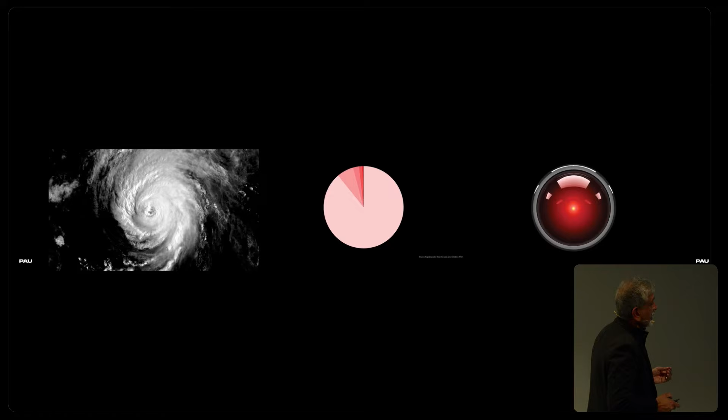That fear of technology, the idea of what AI is going to do to our world. But even more recently, technology in terms of the pandemic, and understanding that it created all sorts of mental health issues and loneliness issues that we're still struggling with, especially young people today. So I want to get back to that.

So what's interesting is, as you talk about loneliness at one level, you have a world that by the end of this century will probably reach about 10 billion people, and we will probably hit peak population, going from about 8 to 10 billion people according to the United Nations, towards the end of this century. Then population will start to decrease slowly. But still, we have another 2 billion people to figure out how to house and feed. So all of these conditions - climate change, inequity, technology, mental and social health, and population change - I think that is the context that we practice under.

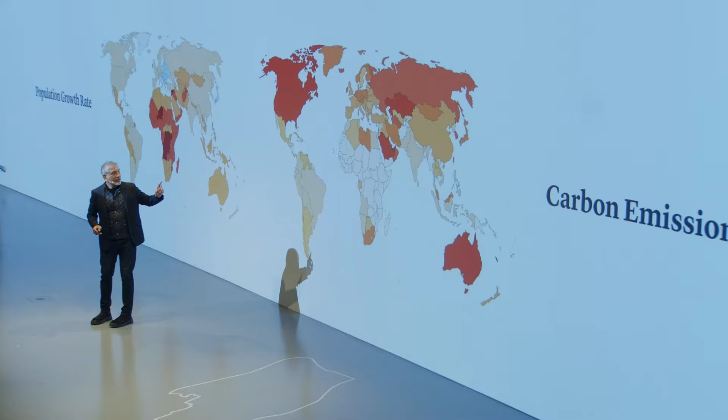What's driving climate change are the countries that have the most carbon emissions per capita. So you see these maps are almost opposites of each other - this is telling you that the places with the lowest birth rates are often using the most amount of carbon because of lifestyle and the way we live.

If you take a more granular look, this is from a data scientist at Berkeley in the United States. This is the East Coast of America - you see New York, Philadelphia, Baltimore, and Washington. What you notice is something very interesting: the carbon emissions per capita is very similar in the city as it is in the rural area.

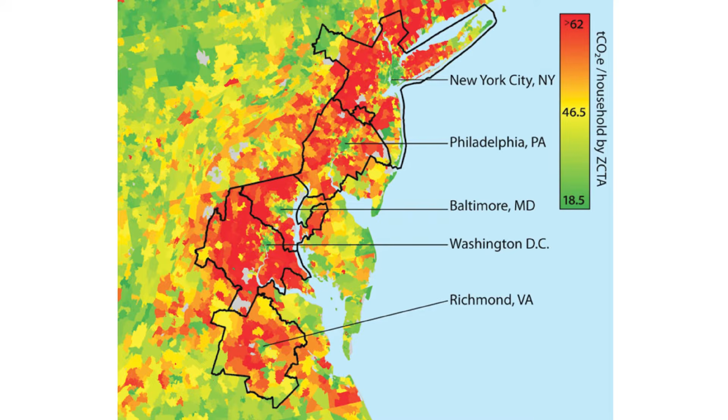Now this might be very different here in the Czech Republic, but in the United States we have this very severe problem, because since World War II we've been incentivizing people to live in those red zones called the suburbs. You see how high the carbon emissions per capita is in those suburbs, mainly because of a very intensive use of cars, houses, and landscaping, which has a strangely very dramatic impact.

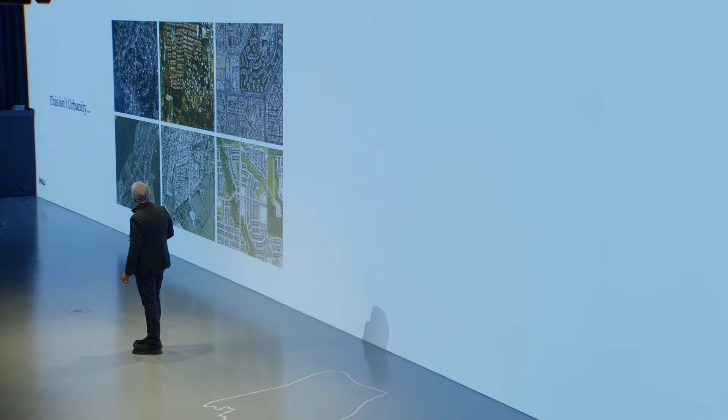And these are actually 6 suburban developments from 6 continents around the world. After World War II, the United States set up an idea for people that if you were successful, if you had made it, this is how you were to live - and they called it the American dream. That spread all over the world to the extent that about 2 billion people have entered the middle class since the 1990s, desiring this lifestyle as a symbol of success.

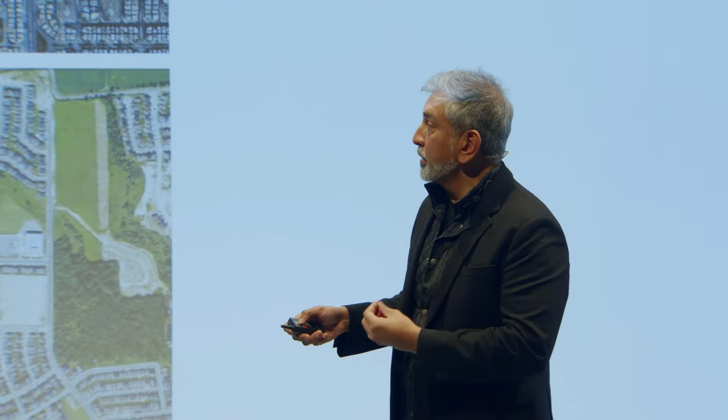But you can understand, as architects and urbanists, that this is an enormous problem in terms of the resources of the planet. It's also a social problem, an inequity problem - all of those things I started the lecture with. So this is really a difficult challenge, that billions of people are choosing to live this way.

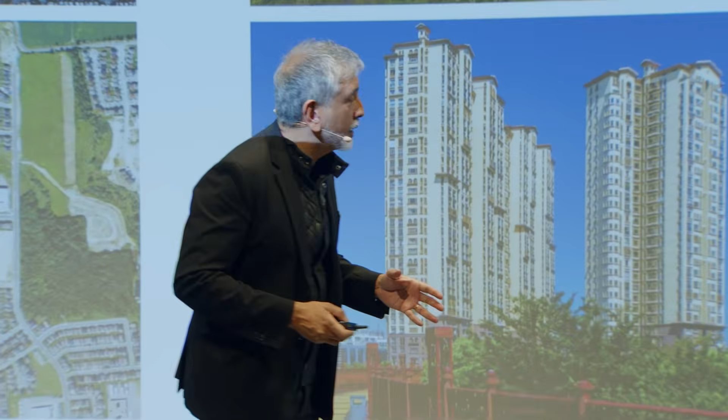But perhaps they're choosing to live this way because this is also a problem - our cities are growing in a way that's not very good. These are 6 housing complexes, again from 6 continents all over the world, where a global development industry has decided that the way to build housing in cities is to use a very generic, cookie-cutter approach - building the same housing complex everywhere, to the extent where people, when they travel, sometimes lose all sight of where they are, and we feel we're losing cultural identity because our buildings are becoming so similar.

These are also, interestingly, in many cities - and I'll talk a lot about this - becoming a huge challenge in terms of affordability.

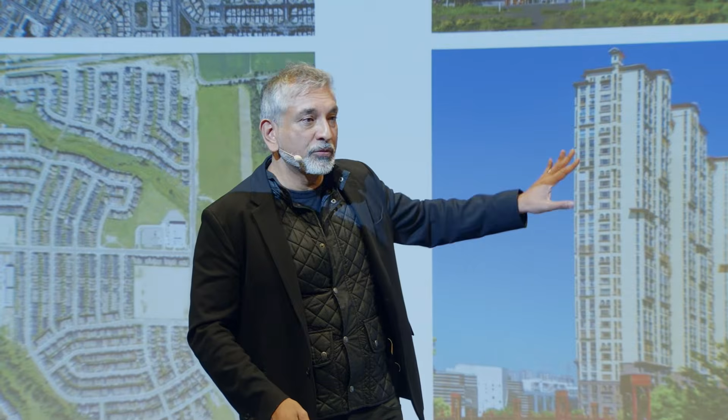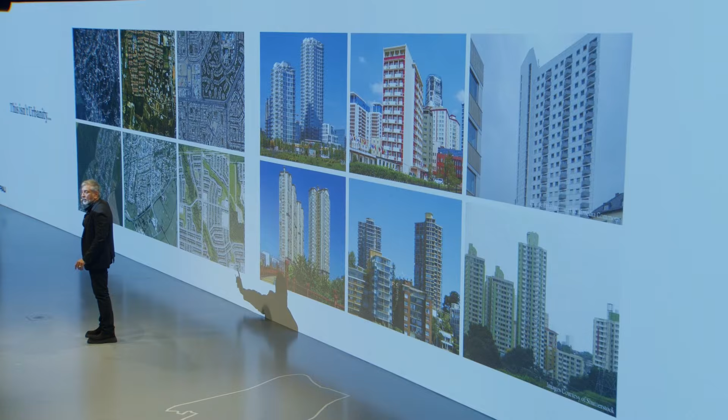I know I've heard a lot that this is a problem in Prague, that people have trouble affording housing in the city. So we have these two poles in which people are trying to figure out how to live. A lot of problems with this are driving this, because people say it's cheaper, I have more space, even if I have to drive my car into the city every day, I'd prefer to live this way with my family. So if we don't fix this, we can't fix that.

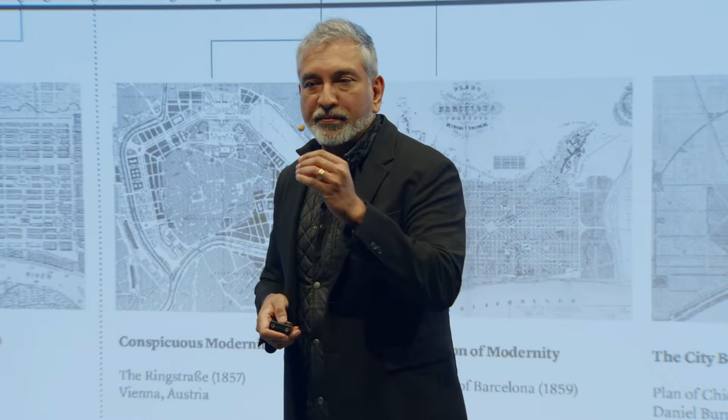So what is urbanity? If it wasn't those towers I was just showing you, what is it? We just had the ultimate test of this with the pandemic, where technologists and economists have been saying for a long time, if we just had the technology, people thought when the telephone was invented that we would stop living in cities.

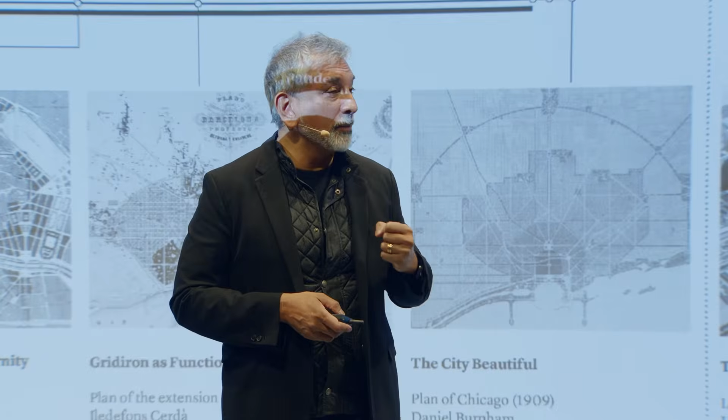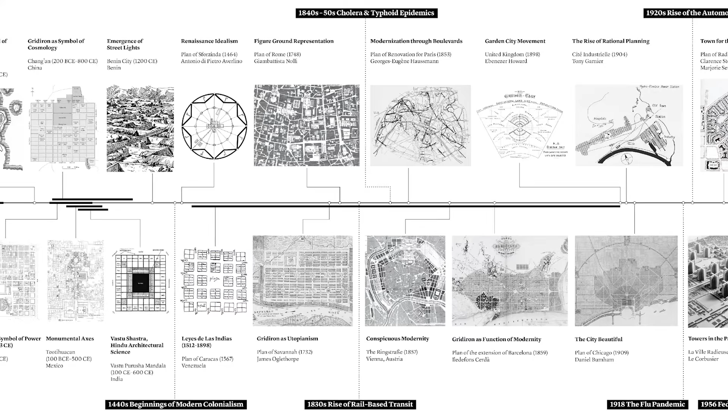And yet, it's who we are culturally. Since the beginning, really, of Homo sapien culture, we have been building collective environments, often for spiritual and cultural reasons, not just economic reasons, not just for trade. This has tended to be who we are, and you can map through civilization across almost every continent the way in which we built cities over time and built collective environments.

And the fact that we just went through a pandemic, and yet we're all here on a Friday night at 7 o'clock when it's cold outside, right? Because we actually enjoy a collective experience together, right?

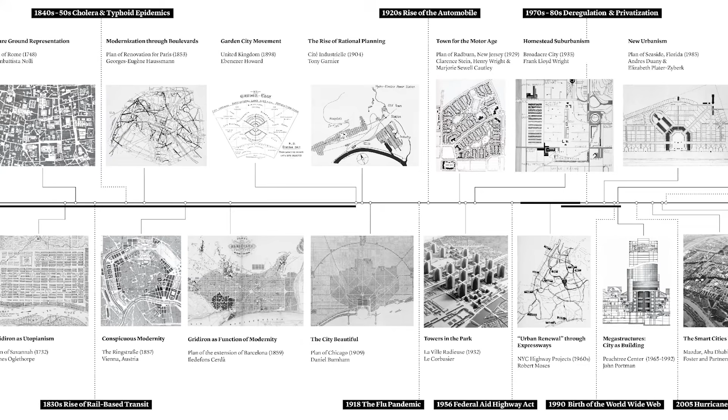So if that's who we are culturally, I've never worked on a screen like this, so I'm going to get a little confused about which slide is where.

We then need to think about, well, what is this urbanity thing? And I have a specific definition. I have a book coming out later this year that talks about this called The Architecture of Urbanity.

So I'm trying to use this word in a different way. What are the ingredients? This comes from a Greek city planner named Konstantin Doxiadis. He wrote this series of books called Ekistics, very interesting. He had this idea that in cities, or even in small villages, every once in a while someone was born who thought differently than the people around them.

They felt alienated in this small place where they lived, and so they started going to denser and denser environments until they finally met people who thought differently, like them. These are the artists, the weirdos, the geeks, the musicians, the architects, the people who just think maybe the world should be different. His idea of urbanity was that if those people met in a place like this, they would spread ideas, and those ideas would change the world.

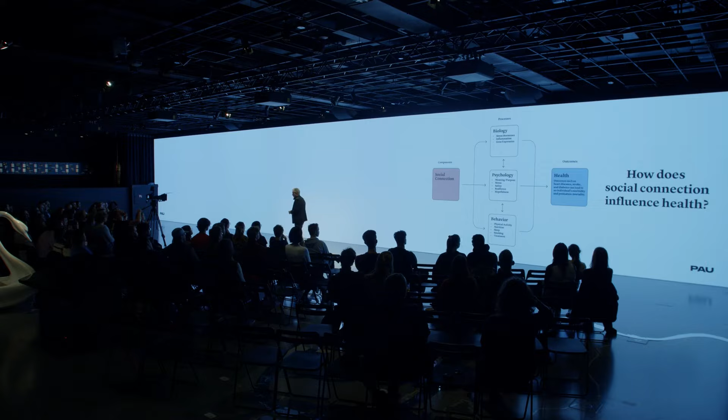Oops, sorry, I keep doing this. My team did this to me on purpose. They said, Vishaan, if you go left to right, then you can go right to left, and I'm not that smart.

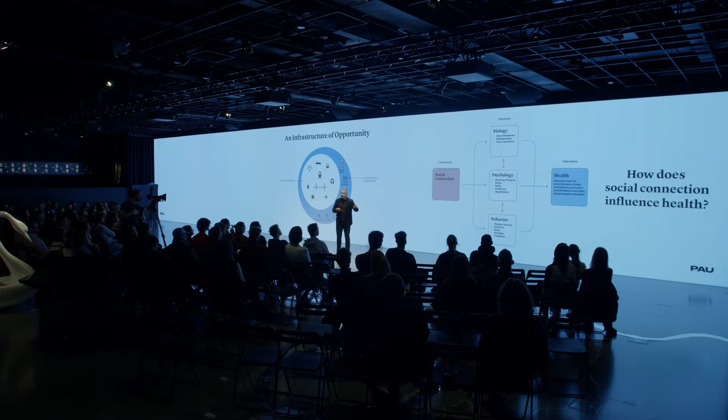So if you build those places I was just talking about, this is actually a diagram from the United States Surgeon General, the head of the medical authorities in the US. There's increasing research in public health that this idea of social connection, which I'm calling urbanity, is extremely good in helping the public health problems we're seeing in terms of loneliness. In terms of biology and psychology, our health is actually impacted by the number of social connections we have.

We talk about climate and these very, very large issues, but this is a very personal issue about how we interact with people and whether we can build environments that create more health. And so to do that, I think we can create things that advance social connection.

I call that an infrastructure of opportunity. What I mean by that is everything from public housing and social housing to green space, to public health care, walkability, accessibility, and so forth.

What that leads to is this idea of not just an economy, but not just jobs, because in a post-pandemic circumstance, when people have much more option in terms of where and how they work, to create more total environments, I think we need a sense of jobs as well as a sense of justice in our environment, that environments are equitable for people, and that they also create a sense of joy. And that, I think, comes from this idea of social connection.

So what I now want to do is give you a few case studies of this idea from our work. Some of it is architecture work, some of it is actually research that we do in our studio.

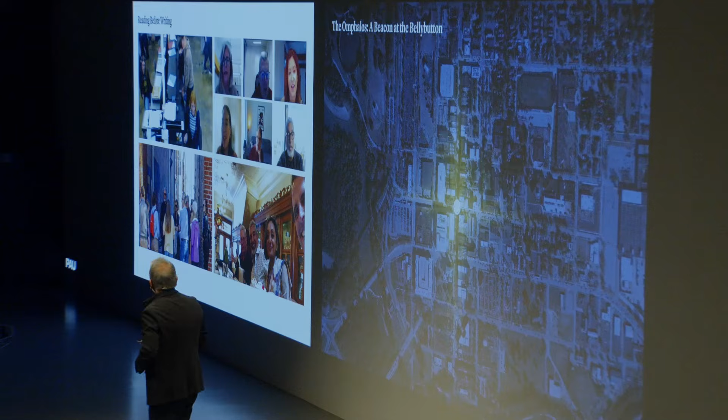And so we became very interested in the center. This is the main intersection in the city, and we called it the omphalos, a Greek word for the belly button, the navel of the city. We said we could really build something very interesting there.

One of the things we know about this intersection is there already were a lot of festivals where they would close down the street there. Actually, it's quite a diverse community, so different ethnic festivals would happen there. We already knew there was that tradition.

So we started doing what architects do. We started looking at what precedents might be interesting here. It's a square intersection, there was this idea of a gateway, and the Pantheon kept coming up.

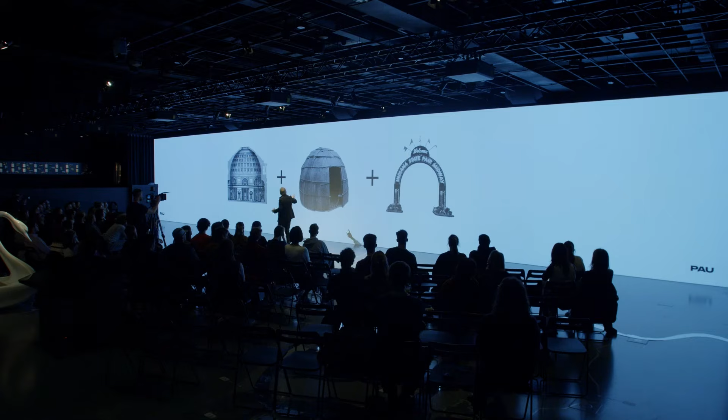These are wigwams, which the indigenous people who originally lived in this area built as dome structures. And then even more locally, there are these gateway structures that were built for local fairs.

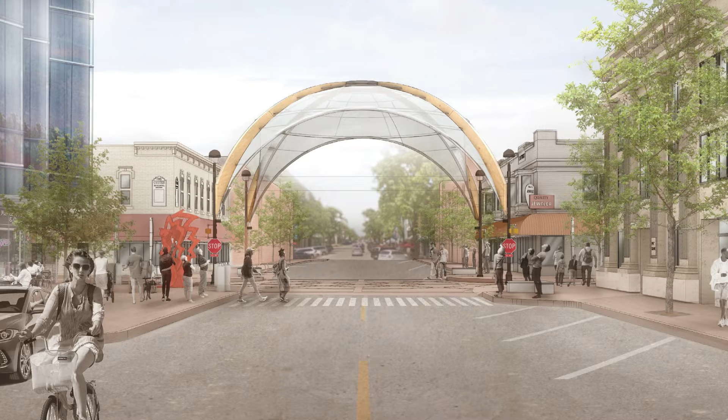And so we proposed this kind of tent-like structure. It's a very simple thing, right? Over the main intersection, it could also be a place for parties at night, lit up with projections and so forth. And people got very excited by the idea.

And so we started drawing it, and we had about 3 months for all of this. We came up with the right details and so forth.

And then it had to get built in about 6 weeks. So we had to commission the steel, commission the fabric, and up it goes and up it goes. And then, of course, we realized that the intersection wasn't square. It was actually a rectangle, which threw us for a while.

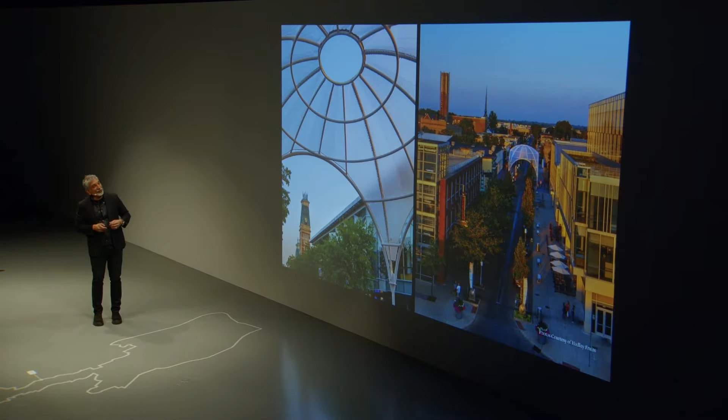And it was actually this very interesting success story. There it is again, and so there you see it. I just got a picture from a local resident who sent me a picture of it in the snow, because this was only supposed to be up until last month.

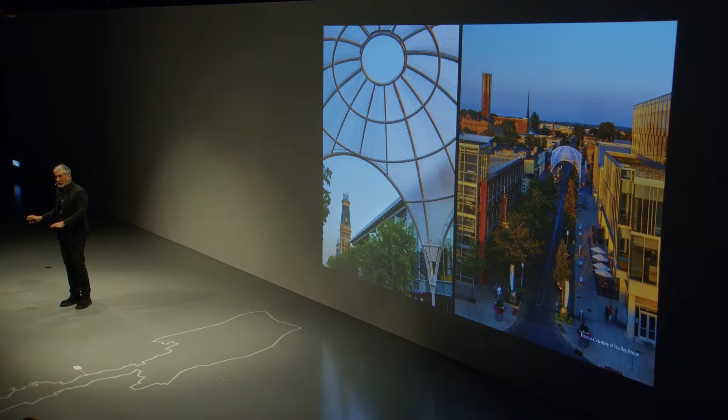But when we presented it to the community, they liked the idea so much, they said, we don't want it to be a temporary art exhibit, we want it for longer. Which meant we had to redesign the steel to hold snow and take a much larger load. And so we did that as quickly as we could.

And so this is the opening night party. You see me and one of my studio colleagues, Ruchi, our studio director, there. And someone arranged this extraordinary opening night party that had almost every ethnicity in the town—Japanese, Indian, Black, Latin American—do dance performances, and then this kind of extraordinary party happened afterwards with kids that were allowed to wear colors. They didn't just have to have all white uniforms on.

And they love this, and it's lit at night and so forth, and it's been a big success, and it's out there today. And it's been proof to me that a very small intervention can sometimes—

By the way, the most interesting thing about this is it's over an intersection that usually has cars. So this really freaked out the mayor, because the mayor's like, well, won't the businesses want cars? But the people wanted the space. And so now they're closing it more and more.

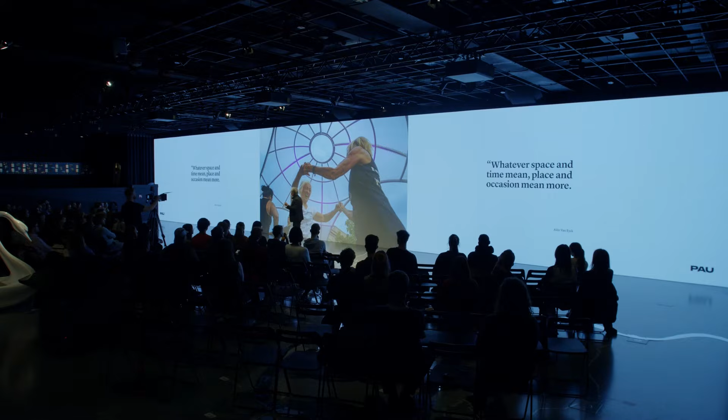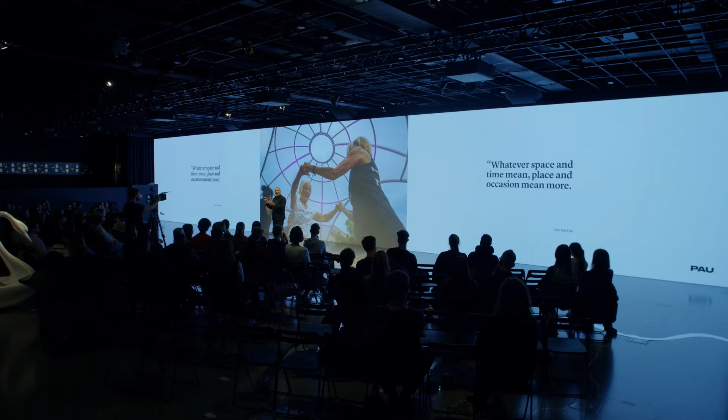And to me, it's a very important reminder of one of my heroes in architecture. Hopefully you've studied his work, a Dutch architect, Aldo van Eyck. He was an early modernist, but he had a different idea than Le Corbusier or Mies about architecture. He felt that what was really important about architecture was how it changed through the user experience, how users actually redefined what it means. So he said, whatever space and time means—space and time, Sigfried Giedion, if you study that in architectural history—place and occasion mean more. In other words, how people use it changes the architecture itself, in the idea of Van Eyck. And so I think we kind of witnessed that firsthand with this project.

So this was an old sugar refinery. It has a complicated history with slavery, because slave ships would come and bring sugar cane here. It was operating as a sugar refinery until 2004, and then the sugar refinery actually moved, and so this was shut down. And it's interesting—our local authorities designated it a heritage building, so it's a historic landmark. And yet there was this real question of what you could do with it, and it had 11 acres around it.

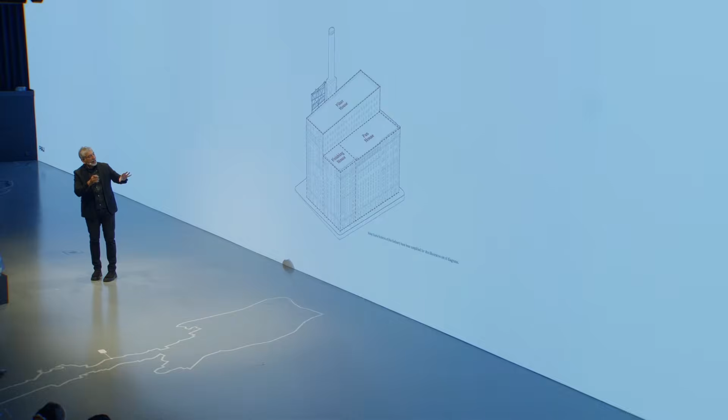The idea for the building is to put a creative office building in it. And there's just this whole question because the windows didn't line up, and that was okay because most of the facade is actually fake. It was there to house machinery as an envelope.

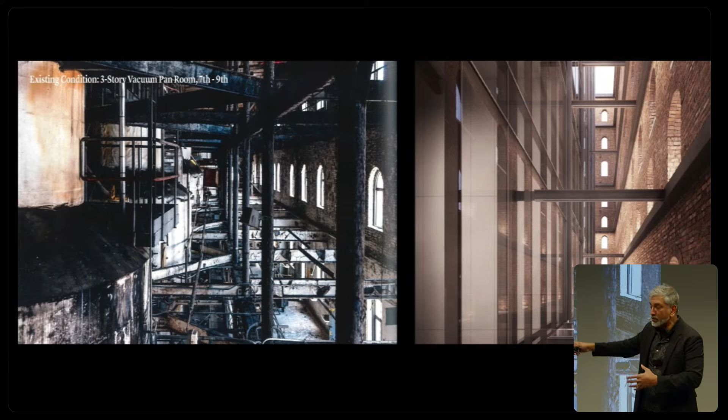So this is what the inside of the building looked like. This is where they process sugar. So you'll see there were no real floors that lined up to the windows. And when you don't have windows that line up, how do you strike a floor across it?

We have very, very strict wheelchair regulations in the United States, so you can't have lots of steps and so forth. So we started thinking we could put a new building inside the old building. That's the new building on the left, and to the right you're seeing the inside of the historic fabric of the building. So it was actually emulating the previous condition.

And so then we had this, and the owner was very interested in this, and so then we built lots of models and said, what shape should this be?

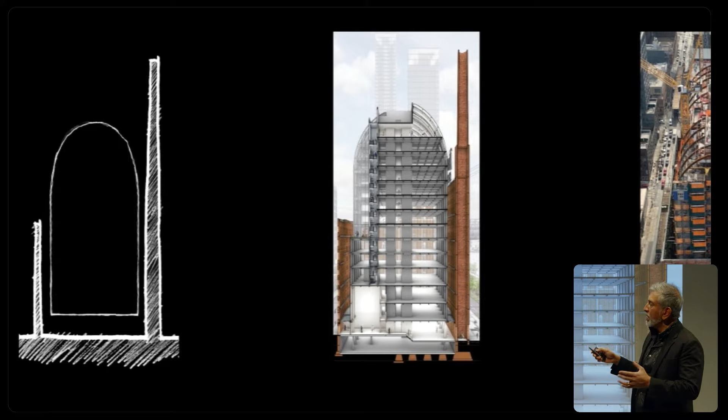We kept coming back to this basic idea that the building was built in something called the American round arch style. The arch window is actually a fire protection device. You see these arch windows right here. That's to eliminate the wood lintel that held up the brick, and that actually kept it safe during fires, and we wanted to celebrate that history.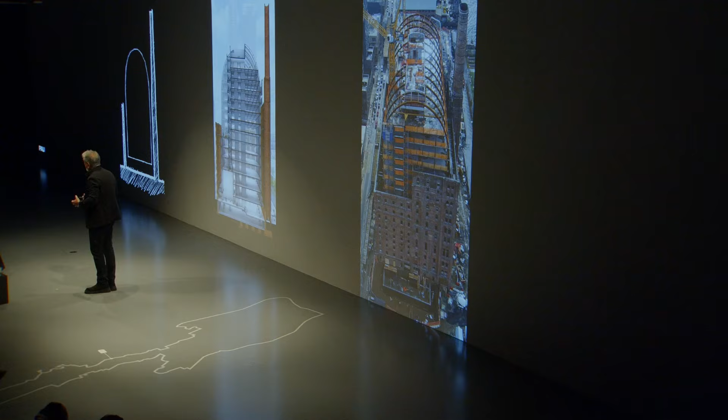And so this curved barrel vault form kept coming back, and that's what we got approved through our local landmarks regulatory body. And so that's the gap today, that's what I showed you in the rendering. There's actually 25 trees planted in that gap.

So when you're inside the building, you're looking through a very modern curtain wall that we've detailed. And you see that barrel vault emerge from the exterior to form that new kind of skyline piece. This has been, I think, very well accepted by the community, by local officials and so forth, as this very interesting tension between old and new.

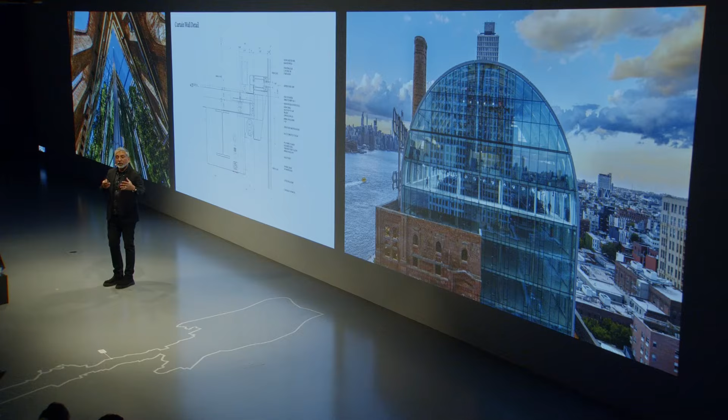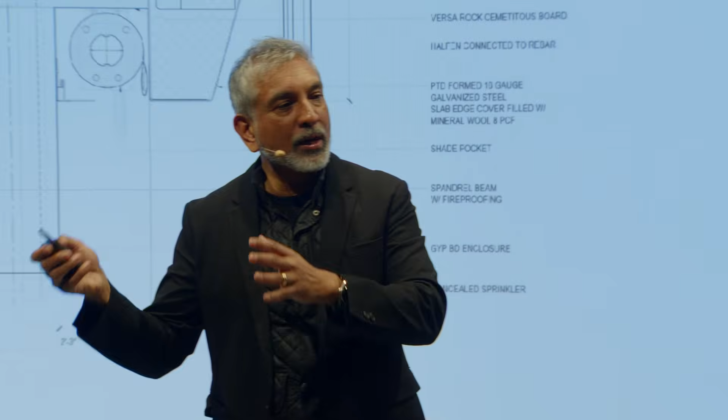Remember what I talked about before, this notion that architecture is becoming so much the same. This can only be here. You can't take it and move it to Dubai or Shanghai. It won't make any sense. And so that is this idea of the architecture actually helping people to understand their own community.

So staying with it, I often, when I think about buildings, think about how they meet the sky and how they meet the street. To me, those are the 2 most central components of a building. And so we just talked about how it met the sky, how it meets the street.

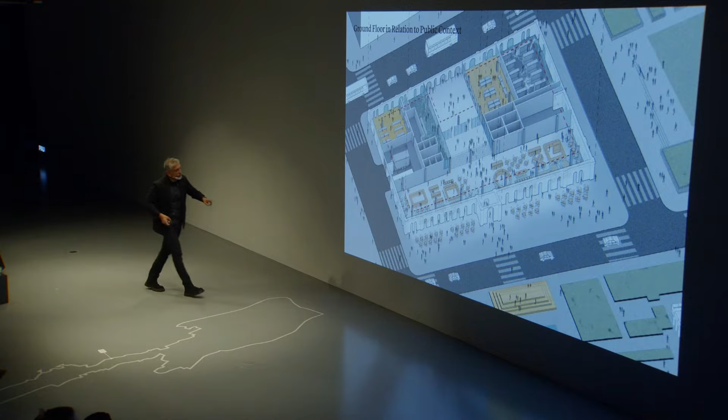So we've designed this beautiful park. We convinced the regulatory authorities to make all the windows in the building door height. So the building is much more porous, even though it's very muscular. And you see that now.

So this is just finishing construction in terms of how, this will be all a public plaza with cafes and so forth. And then you see, by the way, the back of the building, which we don't think of as a back of the building.

One of the challenges with a waterfront building sometimes is everyone is so focused on the water that we forget there are communities on the other side. And so the entrance to the building is actually on the city side, and you can see its location relative to the rest of the city.

And then finally, the top of the building, which has become a great gathering place, a great place of social connection, and already there are events taking place there, and it's a really exciting space to be in.

Okay, then the last architecture project I wanted to show you is in one of the poorest parts of New York City, in Brooklyn, but the other side of Brooklyn, East New York, where we're building this major housing project around a church. Our client here is actually the Reverend, the head of the church, and he has 11 acres of parking all around.

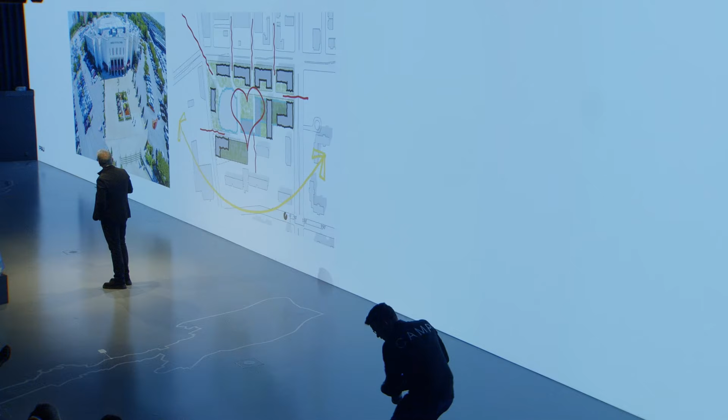Many people had approached him, so we approached him with a builder and said you could build a civic heart. He's a very interesting man. He's read a lot of Jane Jacobs and other urbanists, so for him, how the buildings met the ground was everything. What's interesting about this project is it's 100% social housing.

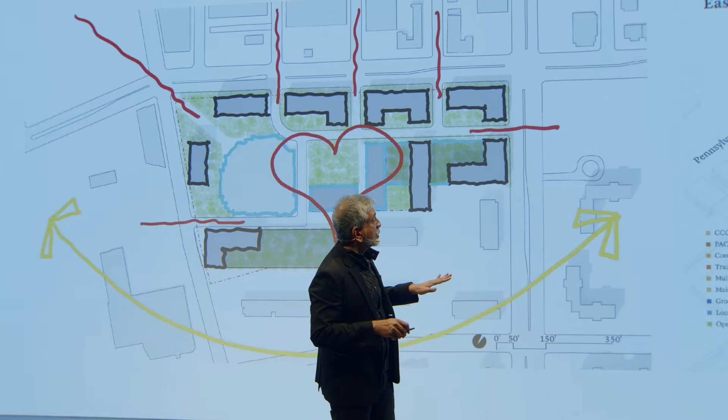It's everything from housing for formerly homeless people. Understand that in New York City we have a massive homelessness crisis. We have about 100,000 people living on the streets, including a lot of children. So there's transitional housing for the formerly homeless, and then all the way up to kind of working class housing, all surrounding not just this church, but a new performing

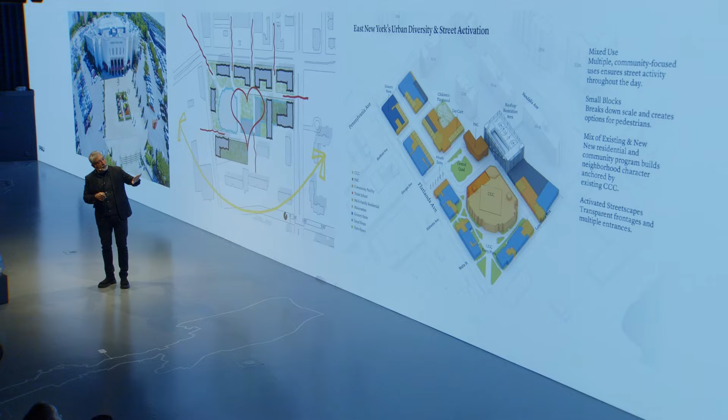arts center, as well as a lot of public space. The Reverend had this idea that on the ground floor he not only wanted stores, but also what he called social infrastructure—for instance, 24/7 daycare, because a lot of the poorer residents had children but worked at night, so they needed a place to drop off their kids at night. The ground floor is filled with those kinds of services.

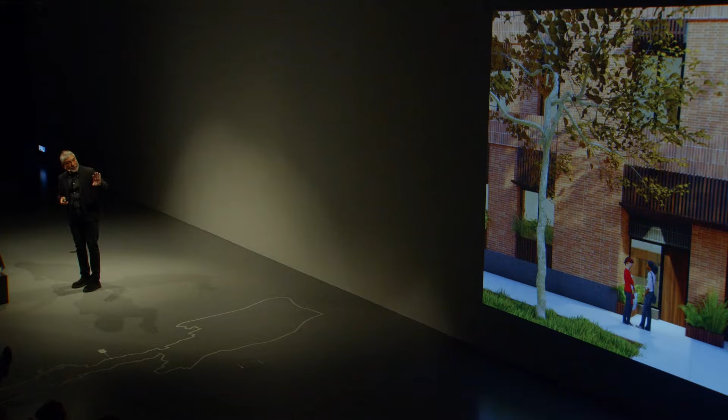It all has this idea of a central quad that's the heart of the place. We're in the middle of designing—these are actually fairly raw drawings, not professional renderings, just what we did in-house. But brick was very important to the local community; that was something we heard again and again.

A performing arts center that we're still in the middle of designing, and this will probably take some philanthropic dollars to complete. But this is not a part of town that gets performing arts centers. So that's about a 300-seat facility, because there are a lot of local arts groups.

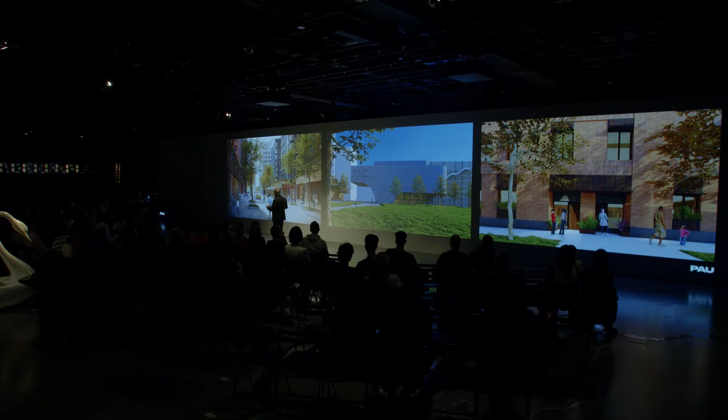And then this idea of a complete street with very few cars on it, with a variety of scale of the building. The budget is very, very low. Unlike Domino, which I just showed you, which had a good, healthy budget, this is a very low budget, kind of because it's 100% affordable housing, but we still think it creates a very dignified environment for this community.

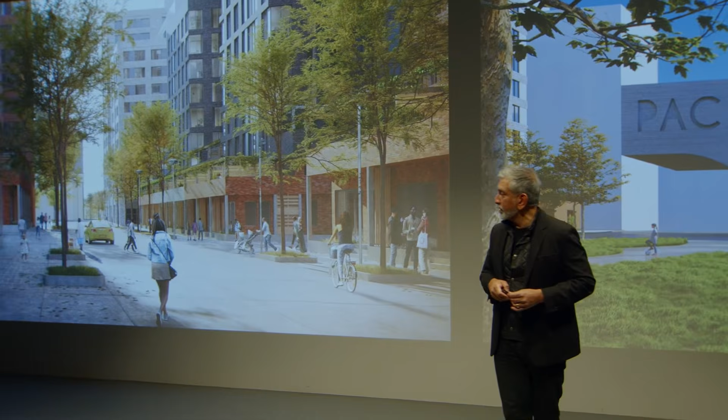So one of the things that we do in addition to this kind of work is we do a lot of research in the firm. And so, there it is.

We started looking at affordable housing and social housing as a research idea. These towers that we build seem very problematic, and we were also very interested—this actually came out of some work that TED asked us to do, the TED Talk series, about creating carbon negative housing. The thing that's interesting is we know we can create a carbon negative single family home. In most sunny climates, you can put enough solar panels today, using today's technology with batteries, to offset most of the electricity use in that house.

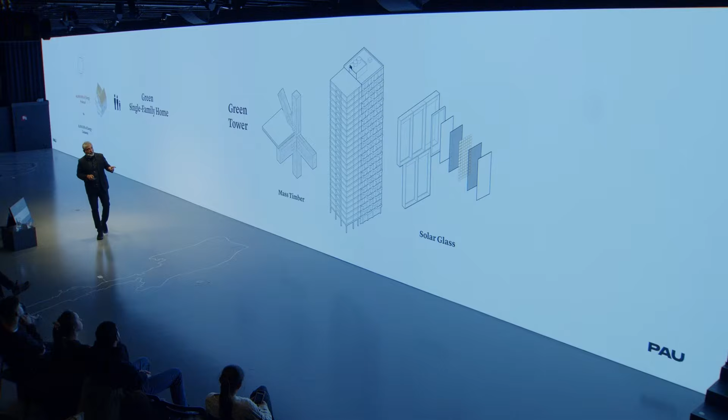But the problem, of course, is the single family home—it's still car dependent, it's sprawl, and so forth. Towers are a much more difficult challenge in terms of creating carbon negativity. You can lower carbon usage, but right now there are all these promising technologies—solar glass, mass timber, bioconcrete—none of them are scalable yet. So we can lower carbon emissions, and sometimes towers in a city like New York or Hong Kong, where you have a lot of mass transportation and demand, it's still a good idea to build that kind of density. But in a lot of places it isn't, and it's very difficult to make this truly green.

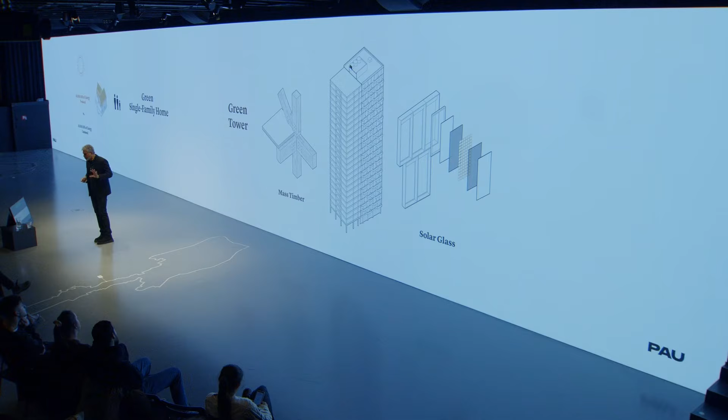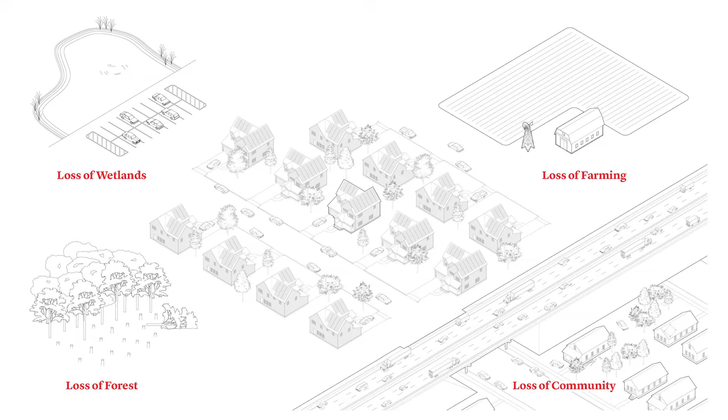So we started thinking: if the single family house isn't the model—and it's not, because even if it's carbon negative, it relies on cars, there's a loss of wetlands and farming and forest, and a loss of that sense of social connection. You will never see kids playing in these backyards anymore; you'll only see them in playgrounds because they want to play with friends. So our research question became: how do we think about a middle scale between these two? And does the carbon negative question bring us to a different kind of solution?

And so we came up with this thing called Goldilocks. I don't know if you know the Goldilocks story, right?

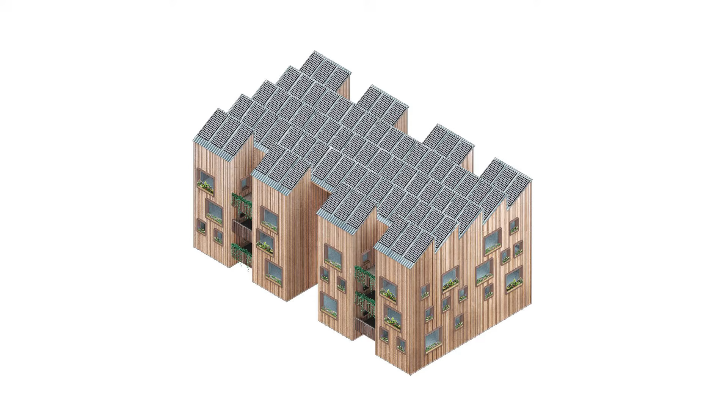But it's the middle one, right? And so this is a scale and a density I'm sure you'll recognize, right? 3 to 4 stories. So why 3 to 4 stories? A couple of things. There's enough roof area for a housing project of that size to actually accommodate all of the power needs in most sunny climates.

It's also an interesting model because the international code, some of the local codes are different. The international code says at 3 stories, you don't have to have an elevator as long as the ground floor units are accessible by a wheelchair. So that lowers construction cost and makes it a much more affordable kind of construction.

And so we found that there's this sweet spot, that there's enough roof area there in most places, probably throughout Europe, that you could accommodate the energy needs and actually produce a little bit more and give back to the grid than what the residents need, the inhabitants need.

And what's interesting is this isn't a design, it's a prototype. So it could be built out of wood in some places, it might be built out of brick or stone. That's kind of less important, it's the model that matters.

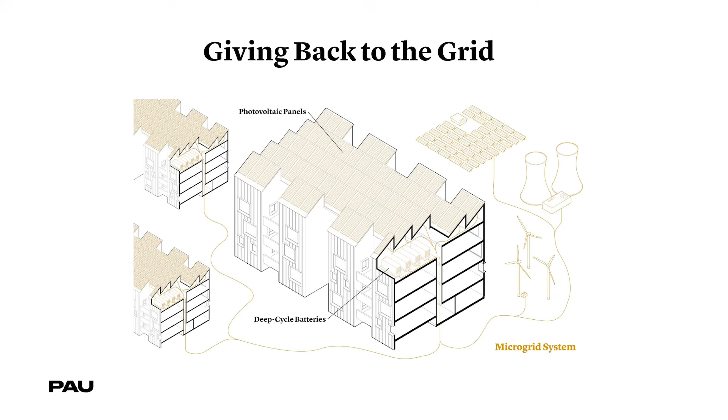And again, we think that with the right technology, technology that exists today, it could give back to the grid. It could have heating and cooling systems, I'm sure many of you know about, in terms of geothermal, heat pumps, and so forth.

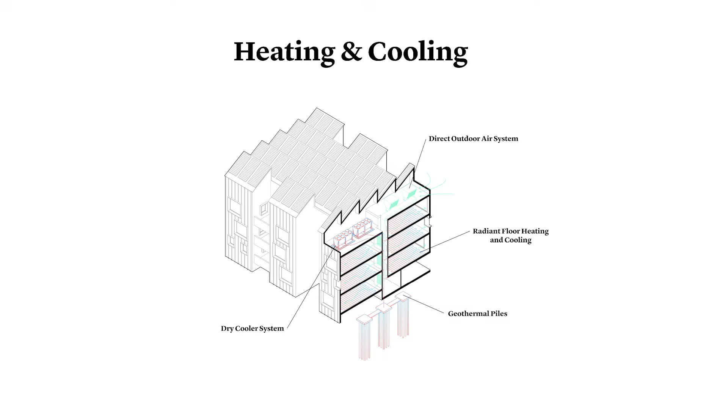And that it could have all the composting and waste treatment that is modern today, and also give gracious flats, gracious living units for people, including on the ground floor for people in wheelchairs. So these are flats that are about 100 square meters.

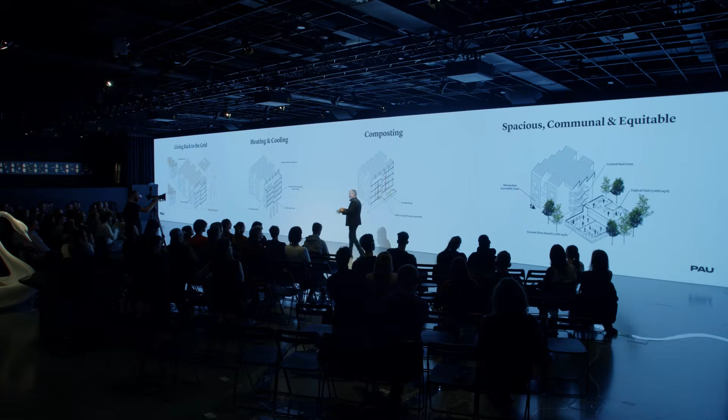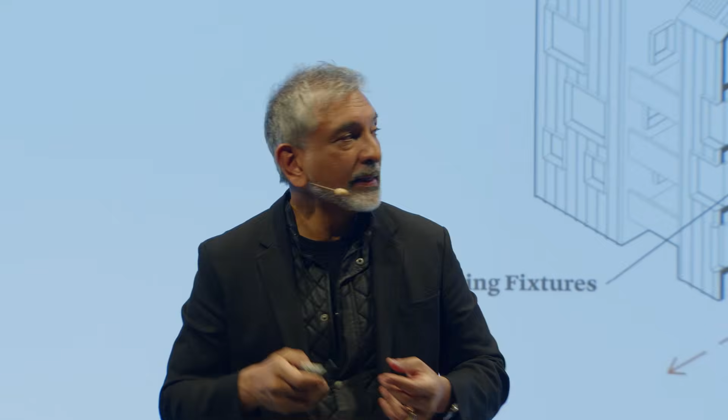And what's interesting in this model is because you don't need an elevator, you can create one communal staircase in that model according to code, a single stair. And what's interesting is many of our older cities are built with that single stair density. That single stair density has this ability to create social connection because people, neighbors all see each other on that stairs. So we think that can be integrated.

If you look at where most available sites are in most major cities today, they tend not to be in the center of the city where a lot of development's already taken place. They tend to be a little bit like on the first ring or the second ring out from the city, still accessed by mass transportation, but where there's a parking lot, low-story retail. We think it can be very well integrated into those kinds of environments.

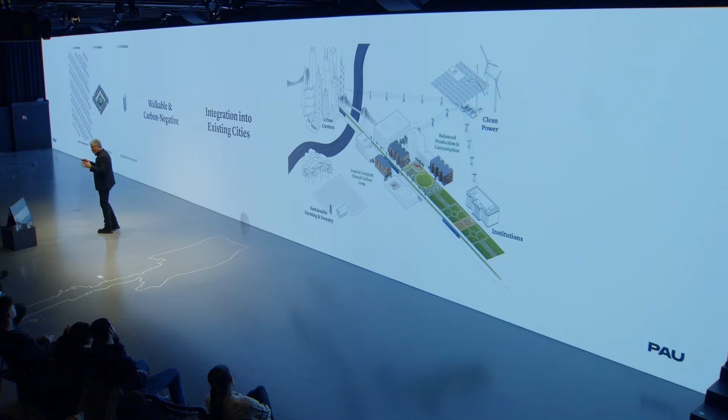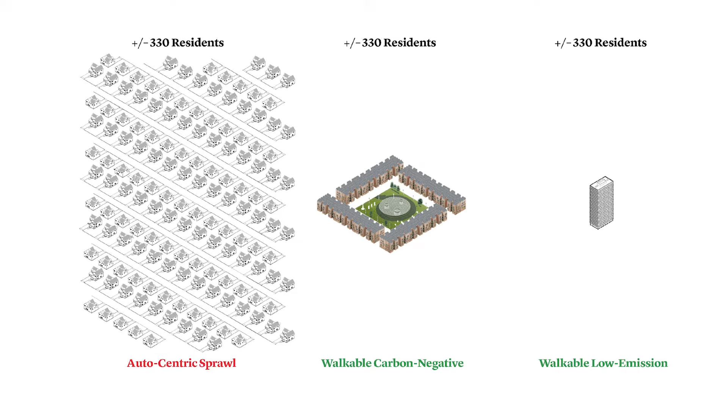And then, I think this is very important in Prague, actually, that when you look at the amount of residents you can house on a lot, you can start creating the courtyard model. And I think courtyards are something that is a historic idea, a very important European idea especially, but you can find them throughout the world. Very, very good in terms of climate and hotter climates.

And so you can combine that Goldilocks unit to create courtyard systems in places that I think need density, and this is quite dense actually, even at 3 stories, but not tower density.

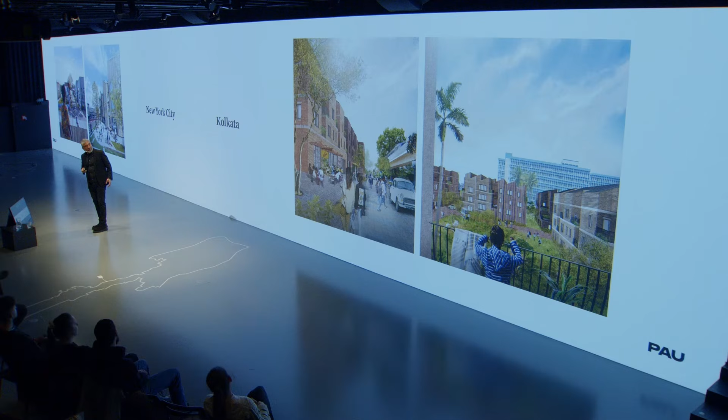And then we close this research by showing how it could be deployed, how it can manifest in 2 different places that I know well, New York City, in this case in Queens, and Calcutta, where I was born, in Northeast India. Again, sites near mass transportation. So here you're seeing a brick courtyard development of that model, and here you're seeing a wood version of that model that's more of a kind of townhouse environment in New York.

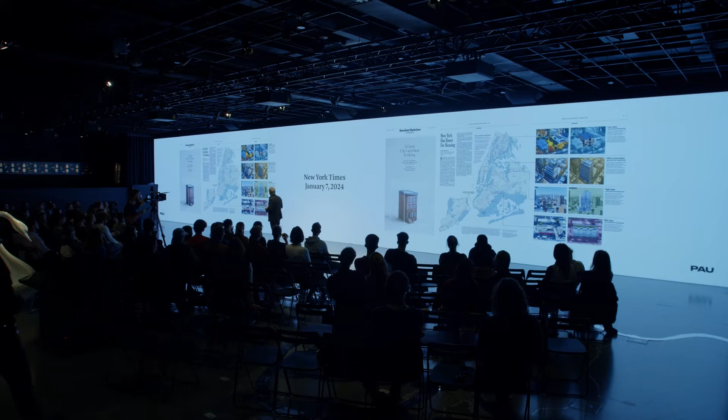So that led to another piece of research. We have recently been doing a lot of work with the New York Times about how to create more affordable housing. This just came out in the paper a few weeks ago, and a friend of mine texted me and said, 'You've broken the internet,' because it turns out a lot of people are very concerned about housing around the world. So basically what the New York Times asked us to do is address this huge housing debate in New York City.

Housing is very unaffordable. We have homelessness, and we also have a very significant migrant crisis. I'm sure you've read about this. We have a lot of people coming over to the southern border, a lot of people coming to New York and other cities.

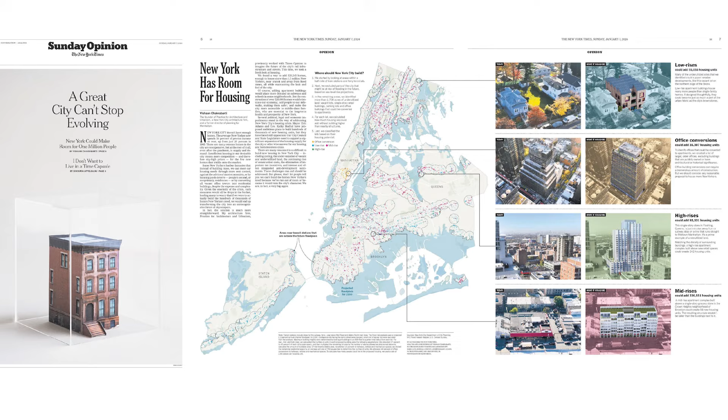New York City has about 8 million people in it, and people assume the city's full, and a lot of neighbors and neighborhood groups push against new housing, because a lot of that new housing comes in the form of these towers. So we said, what if you approach this question differently? What if you approach it as: how could you build new housing throughout New York City, but in a way that kept neighborhood character? In other words, if you didn't change the basic scale, the look and feel of the city that people know, how much housing could you build?

Turns out you can build a lot. So we had a couple of criteria. We said we only wanted to be close to mass transportation, obviously, because we don't want to build auto development. And we wanted to stay out of the flood zones in New York. So those are our two big filters for finding land. And we found an extraordinary amount of land: about 1,700 acres, about 10,000 sites available for housing. That's twice the size of Central Park. It's an enormous amount of land.

What's interesting is I go to a lot of cities, and people always think the city's full. But it turns out the city's actually got a lot of underutilized land. It has parking spaces and retail shops that are very low, and so forth.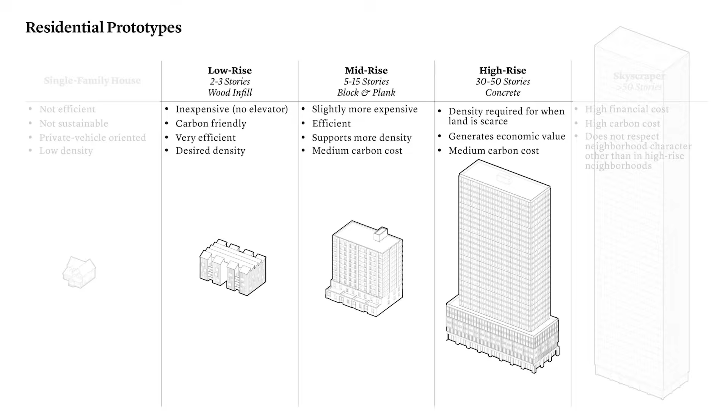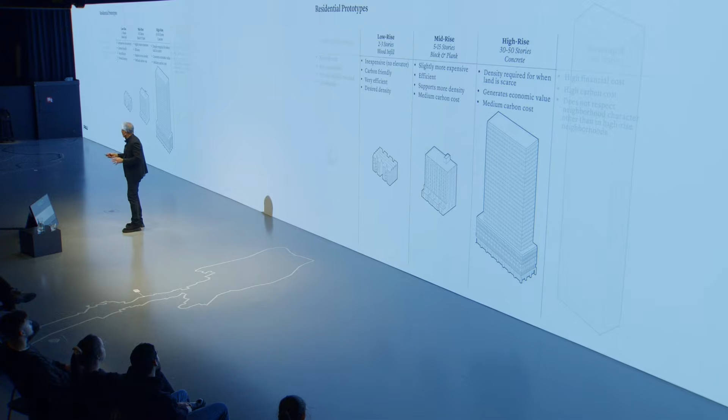So what we did is we looked at it in terms of different scales of height. We used that Goldilocks model again: that was the low rise. Then a mid-rise that's about 5 to 15 stories, which is a different kind of construction. And then 30 to 50 stories, which is contextual in parts of New York City because we have a much taller city. But we didn't have super tall buildings over 50 stories, and we didn't have single-family houses in terms of what we were proposing.

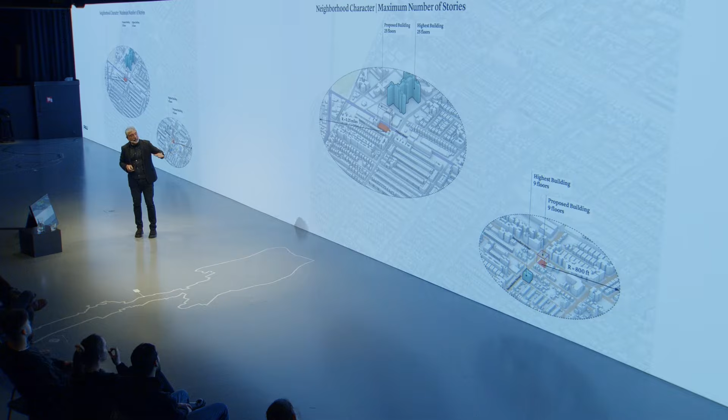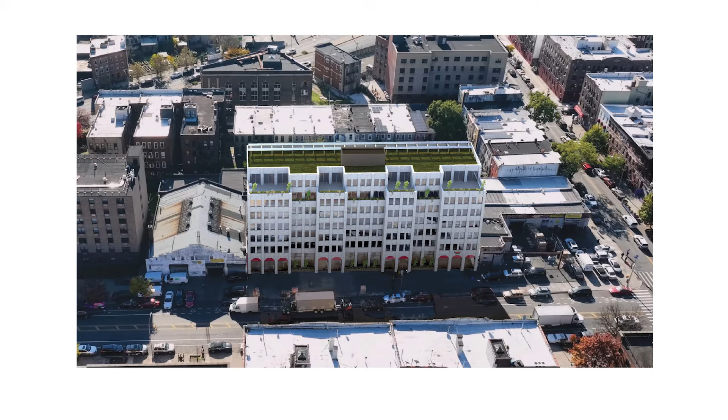And what we ended up with is this idea that if you had a lot like that in a single-family neighborhood, you could build Goldilocks — you could build one of those 3-story units. If you had a single-story retail shop, but some apartment buildings taller around it, you could build a mid-scale — this is about a 58-unit residential building. Or in the taller, denser parts of the city, you could build that taller 30 to 50-story scale.

And then finally, some of our older office buildings — we looked at whether you could convert them, because obviously with the pandemic some of the office demand is down. Could you convert some of that to residential? It's very expensive, we looked at it case-by-case. It's difficult, but we came up with something rather extraordinary. One thing we found very interesting in terms of converting office space, if you're interested in this, is creating communal workspace in the center of the building.

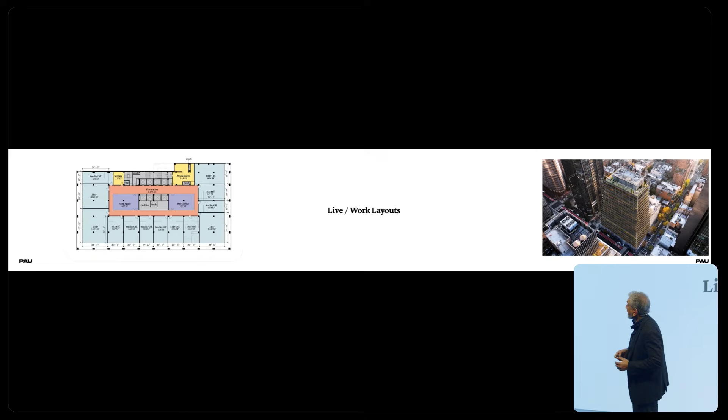We established the ability to build on those 10,000 sites 520,000 homes. That's enough to house 1.3 million people, which I think is the population of Prague — which is extraordinary for a city that thinks it's full. And we said we could do all of that while maintaining the character of the city.

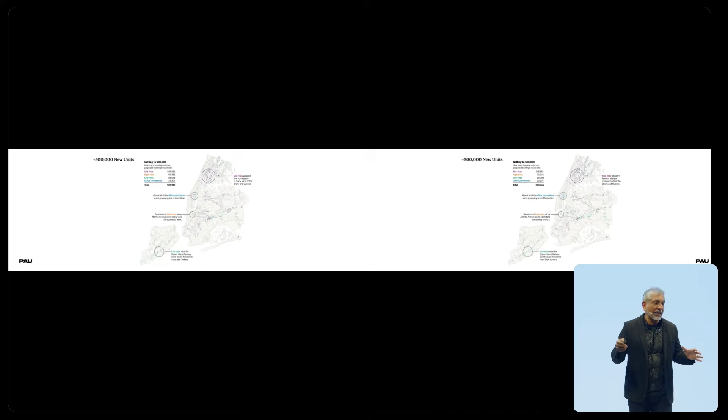What's interesting is after this article came out — and the New York Times did a wonderful job with the visualizations — I got a lot of emails, texts, and things on social media from neighborhood groups who said they liked this idea. They said, we traditionally haven't liked that much new housing in our neighborhoods, but if you can keep it in the scale of our neighborhood, that's appealing. All the developers hated it though, because they don't want to keep to the scale of the neighborhood. But anyway, it was a very interesting piece of research.

I have a couple more things like this that are research, but I'm also aware that because of technology we've sort of hit time. Do you want me to keep going, or do you want to go to questions and answers? It's up to you — yeah, maybe we do.

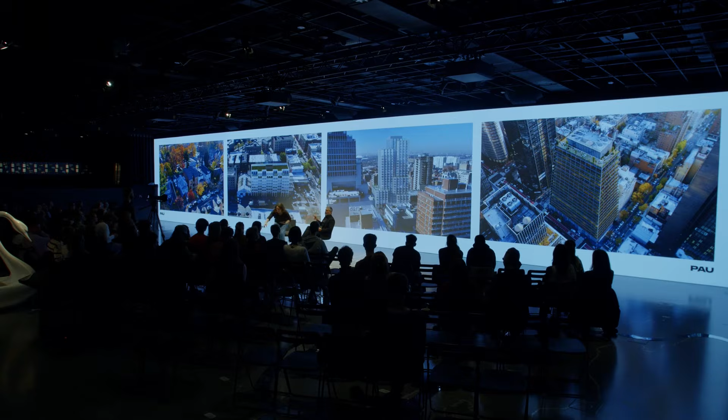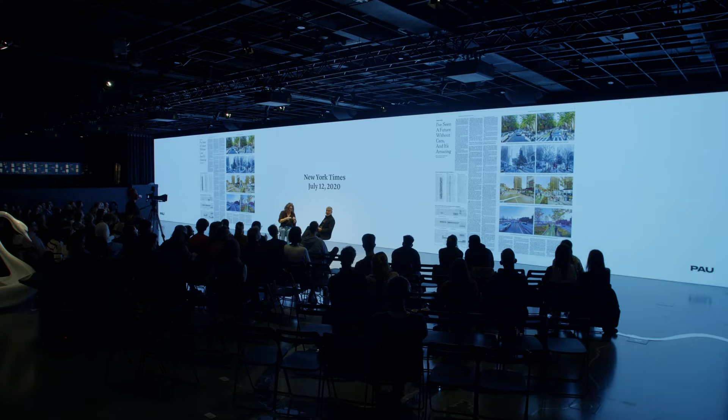The other two things I was going to show you very quickly: we did two other projects with the New York Times like this. One was where we said, imagine Manhattan if you eliminated private automobiles. You'd still have shared automobiles, you'd still have freight delivery, and this was not a technology question, it was a spatial question. It was about how much space you could recover in the city if you took away most of those private cars and had a completely different environment—how much more space you'd have for pedestrians, for bikes, and so forth.

And this has actually impacted some things around policy. We're adopting a congestion pricing policy like London and Stockholm. And what I hope someday is we build a tram system like what you have, by eliminating most of the private cars and having much more surface transportation in the city.

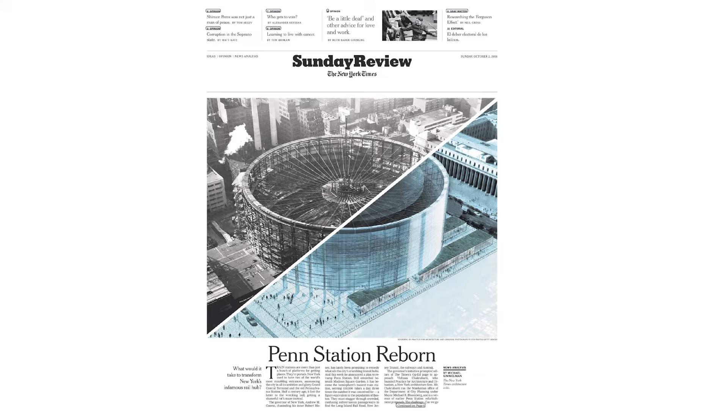And then I won't go through this in detail because it's just too long a story, but our train station is really horrible. It is a joyless place, and it has a big sports arena on top. And this is something we proposed: that if the sports arena moved, we could recycle the building and reclad it and make it into our new train station.

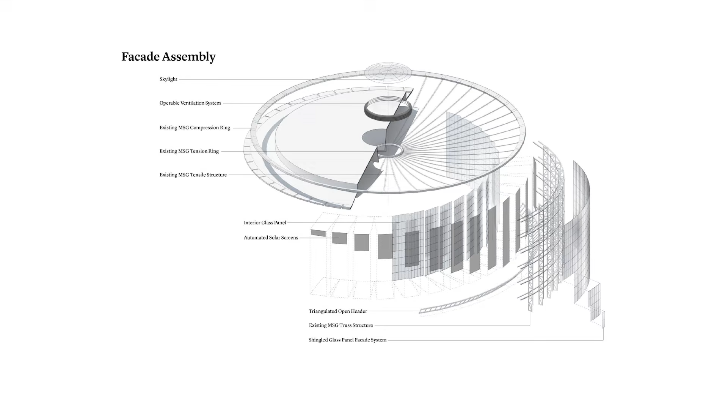And now we're working on this project for real, actually. But I'm going to leave it there so we can go back to the discussion. But it's a nice backdrop, I think.

So are you talking about Madison Square Garden? Yes. So this was the idea that if the garden ever moved—that's the sports arena—we could recycle the building and turn it into a train station.

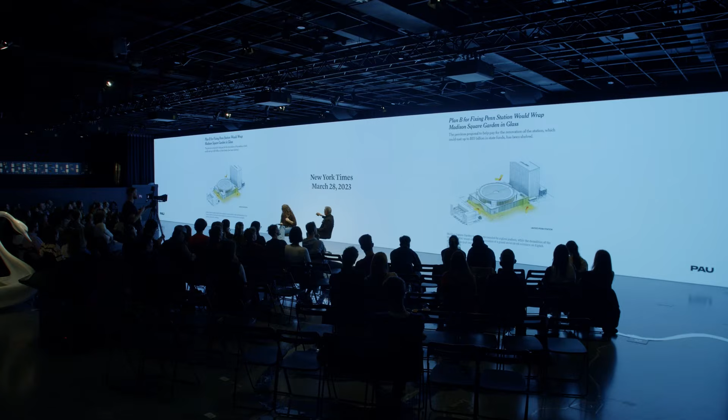All right, I'll just do it. I can't resist, I can't. So then, actually, my current client on this was inspired by that work. That work was from four years ago. And he then hired us to look at it, since the garden isn't moving.

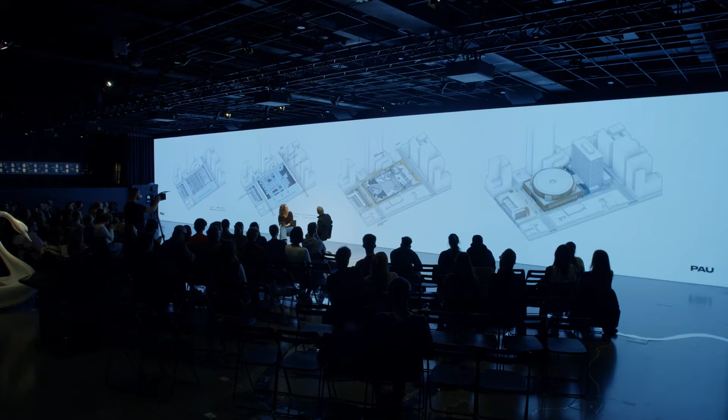So this is the wonderful architecture building that is both our sports arena and our main train station. And he hired us to reclad it and rethink the entire thing, from the tracks up all the way to the sidewalk, to a new facade, and rethink the entire superblock. So we're in the middle of working with our government right now to see if we can make that happen, including changing the experience underneath and all around.

So that's typical of, that's one of the nicer spaces in the train station. So that's what we're working on right now, actually.

That is super interesting, especially from somebody who loves New York. Who's been to New York from the audience? Can I just see? Oh, quite a bunch. So you definitely have seen Madison Square Garden, which is also the most famous concert venue.

And yes, if you're there with Taylor Swift, great. But the outside and the rest of it is painful. It's terrible, and I always wonder how much of the stuff is happening around it and under it and in it, but you have no clue, and also no way to move around, and you just don't understand how it all came together.

This site is layers of history. The original building was a very famous building that got torn down in 1963, and that was actually the trigger for the United States landmarks laws. So when I showed you Domino and said it was a heritage building, the legal function of that comes from the fact that the original train station was torn down here. So there's layers of history, it's a very complex, interesting urban story.

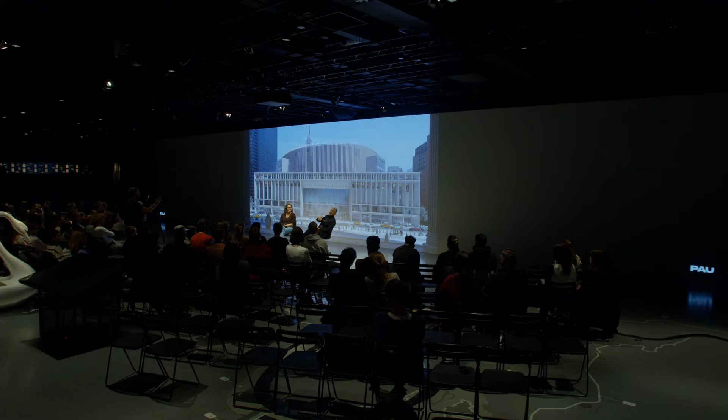If you look at the article, at the bottom there's a methodology website that explains more about the data we used. There are city databases that talk about these sites, and it took us about 4 months to go through those databases to establish the 10,000 sites. Some sites were too small and didn't work, so there were things like that we had to filter out.

I'm glad we did this instead of a developer or a technology company. An interesting extension of your question is this question I have about whether this is architecture. Some architects have said no, it's not — it's community development, it's urban planning. But what I find strange about that answer is I can reverse the question: if an architecture firm didn't do this, who would? Because it takes a broad range of skills, including visual skills.

We thought those housing projects — those are concept designs, obviously — but they looked reasonable, and that was important. They fit into their site in some way that was credible, and that was important too.

If you look at early modernist history coming out of both world wars, this is what architects were doing — they weren't just doing architecture. In Germany you had the whole tradition of the Siedlungs. There's this whole tradition we forget about sometimes, where architects were deeply involved in these big societal questions — the same architects we study in school: Corb, Tange, the Smithsons. Every one of them published treatises at different points about housing and the city, and some of them had terrible ideas, especially Corb. But it's really important to understand that tradition.